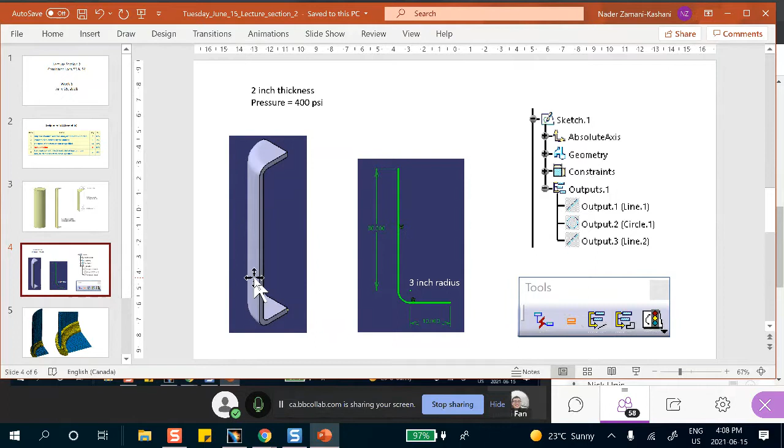Now, we modeled this thing with shell elements, right? You remember that? We modeled this thing. So if this problem is given to you, you must use shell elements to solve it.

It's a must. The problem is that shell elements have some assumptions in them. For example, there is no stress through the thickness, or a very small, nearly zero stress through the thickness. The problem is that when you get to these edges, the situation is so complicated that the assumption of zero stress through the thickness is nonsense.

So what I really want to do, if I want stresses in this area, for some reason, these shells are totally useless. Okay? You stay away from it, no problem. But close to these edges, we have a problem.

Even here, there is a stress concentration. Even here, there is a stress concentration. I drew it on purpose as a solid object, but if you have to solve this problem, you solve it with shell elements.

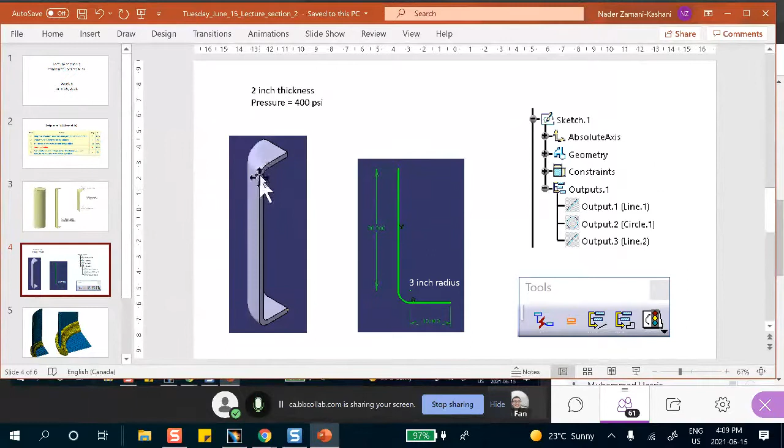However, here we also have stress concentration, and if you want to know the detailed stress distribution in this area, shells are going to suffer from the same thing that they did here, except that it's not as bad. I mean, it's bad, but not as bad as this.

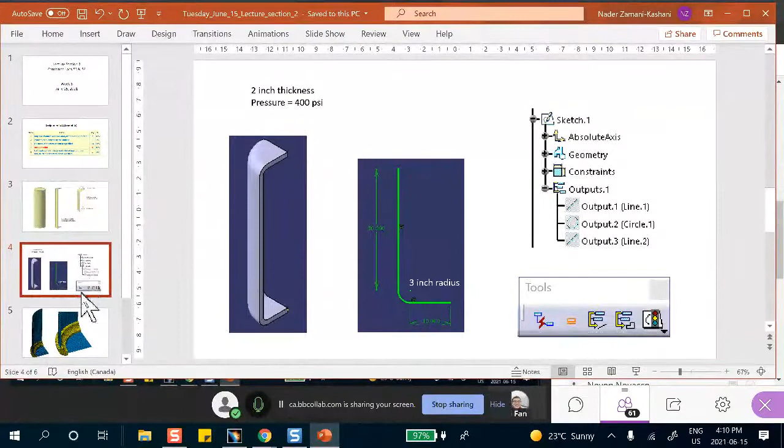So what do people do? Well, they go do something like that. In other words, the wall of the pressure vessel on the top and over here, where things are okay, not that bad, you use shell elements. And over here, where the stress concentration is, where the stresses change rapidly, you use solid elements.

Solid elements. And what do we call this? A hybrid model. We call this a hybrid model. I don't have a beam here, but that's okay. That's still a hybrid. When you have two types of elements present, it's a hybrid problem. Obviously, if you see a beam sitting there, you should model it as a beam, but there is no beam here.

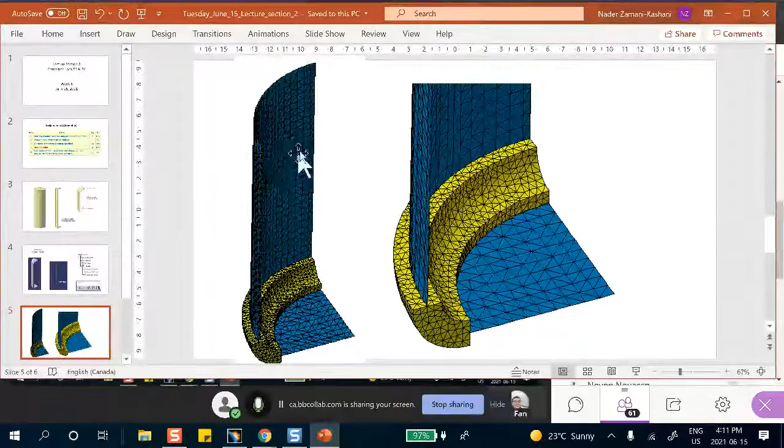Incidentally, even here, if there is reinforcement around this thing with something reinforcing it, then you model those as beams, but I don't have it here. I don't have it. Now, I'm going to solve this problem for you.

We know how to handle hybrids. We know that. And I want to show you some results, and then I want to tell you that yes, this is going to work. We know how to do hybrid problems. We know that. This is the end of the week. We have done many problems like that.

But these elements that are the default in CATIA, remember CATIA, as soon as it sees something, it jumps on it and meshes it in 3D. These are not very good.

This, where is it? Oh, here. This is a much better element, instead of those pyramids and stuff like that.

These are called... these are not tetrahedral. These are called tetrahedral, the pyramids. These are hexahedral. Now, you can do it in CATIA, but not just by saying, hey, you do it for me.

That's where the advanced meshing tool comes into the picture. If you want to do stuff like that, even for shells, and you don't want triangles like that, which are poor in general, you have to use advanced meshing tools. Okay? Now, I'm not going to do this for you, but I'm going to do that problem for you.

Any questions here? That's why we need hybrids, among other reasons. If you look at the bridge structure, you've got braces and you've got flooring and you've got, I don't know, girder boxes and things like that; you have all kinds of elements in it: solids, beams, shells.

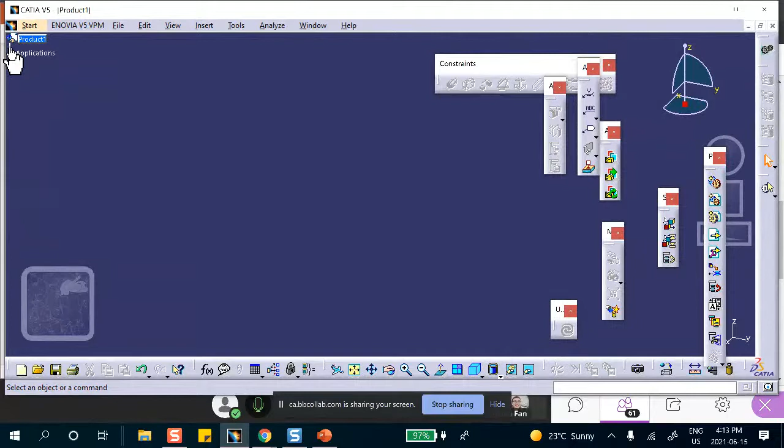Okay, how are we going to do this problem? If there are no questions about this, I'm going to do that problem for you. And in fact, you're going to learn a few things that you may never have seen. Okay? There we are. We start with a product file. I don't expect you ever to go to the advanced meshing tool. That's why I'm not going to do that second one for you, but that's where it's done.

So save it right away. File, save management, save as, desktop, new folder. Okay. What do we call this thing? Lecture section 2. Pressure vessel. Okay, how about that? Pressure vessel. Okay, good.

Oh, wait a minute. Let me ask you a question. This is a hybrid problem. We know that, and that's what we want to do. What options do we have for doing hybrid problems? Can you remind me, please? Doing it in a part or doing it in assembly? Absolutely. Let me do it as a part, okay? I can do it in assembly too, but I'll do it as a part because you get to see the thing that I want to do much better. Cancel that. Let me delete this. So let me start with a part.

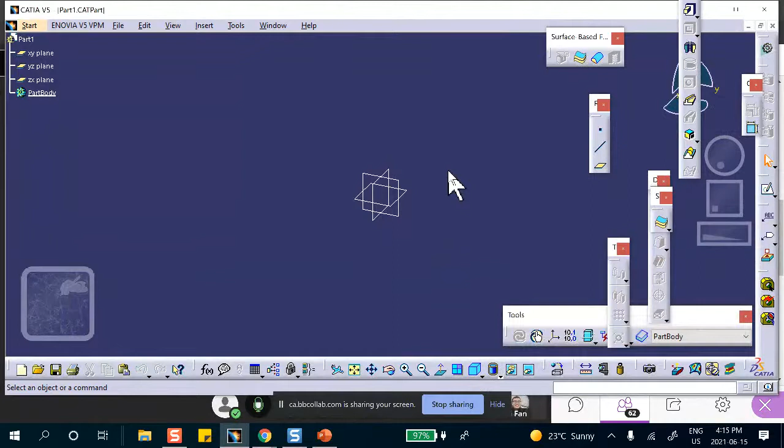And now I'm going to save it there. File, save management. I think I already made the folder for you. Save as. Okay, we may have called it pressure. I didn't call it assembly. That's good. Fine. All right. You're going to see something that, in all likelihood, you have never seen before in making this part; you're going to like it. So on that vertical plane, I will sketch.

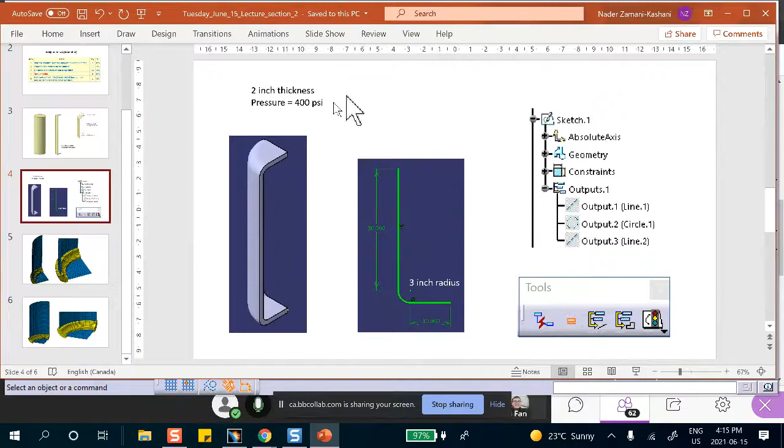Now, if you look at this drawing, I have 30 inches here, radius 3 inches there, and this is 10 inches. And remember, this is going to be a shell. I'm going to draw that thing and then revolve it. It's called revolve, right? So I'm going to draw something like that. Here, and we're going to dimension it in just a second.

It was a long day. Started at 8:30.

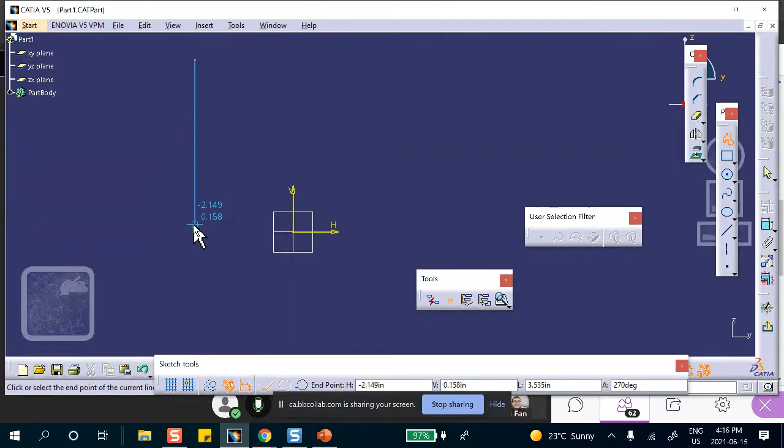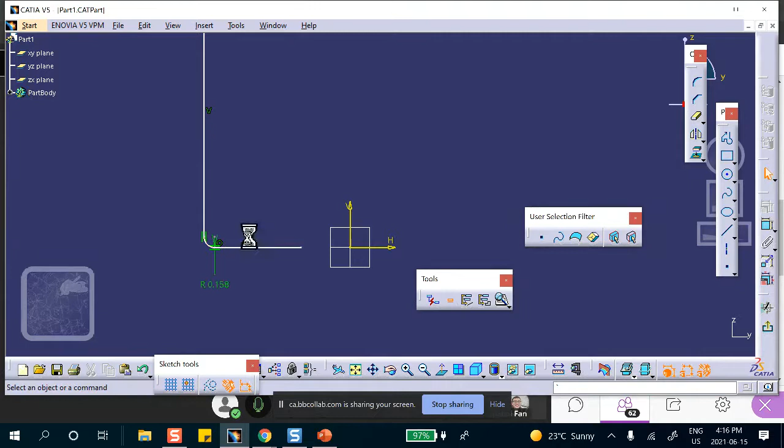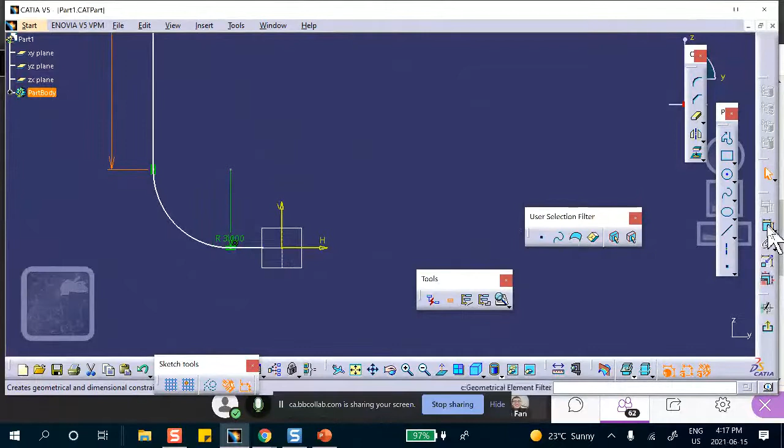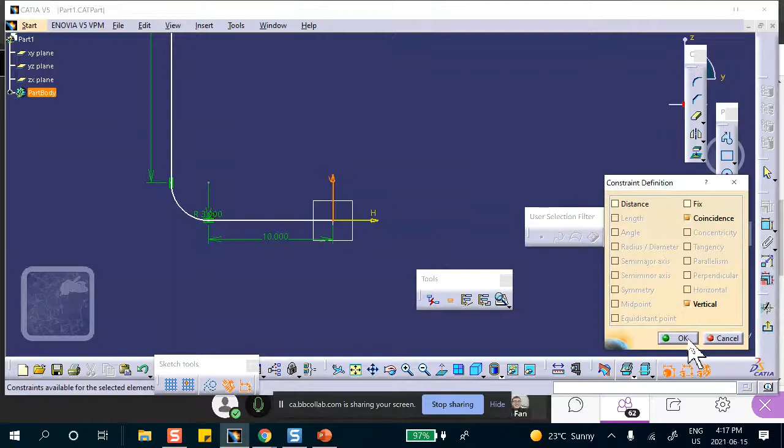Don't worry, we're going to clean it up. First of all, let me make this radius bigger. 3 inches there. Oh my God, this is 0.1. 3 inches. If that looks ugly, I'm going to clean it up again. Okay, that's good. So this height is 30. And this length is, I think we said, 10. It's just that I want to move this thing to there. So that point, control that line, you make it coincident, so shift it to the left. Okay, good. So what you see here is this.

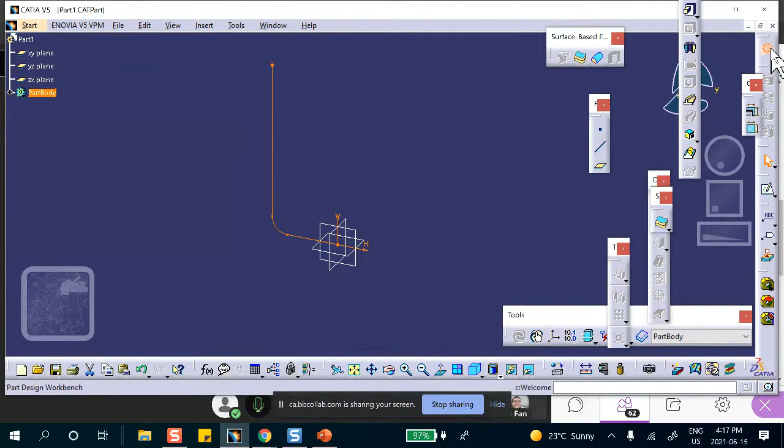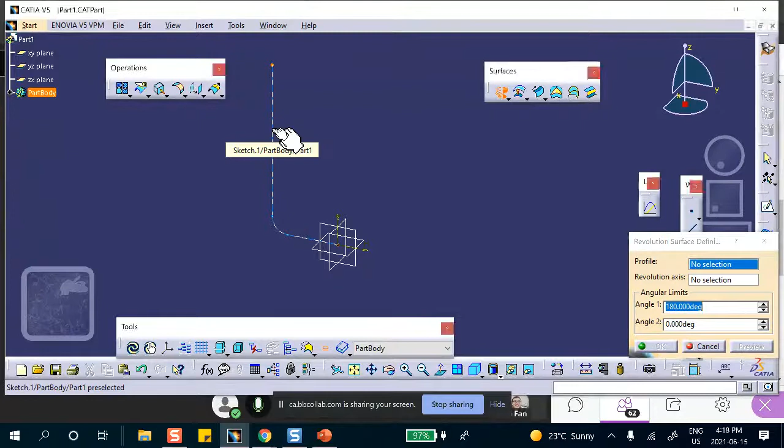Now, I want to use shell elements, I told you. So first of all, exit this. We have to be in generative shape design, not in part design. So we go to generative shape design. And I know how to make this thing go around. There it is, revolve. Now, I want to do this thing separately: this vertical line to go around, then this guy, then this guy. But the problem is that when you select the sketch, you don't have much choice. About the z-axis, the whole thing will go around. I don't want that.

Cancel. Now, of course, you could have done it as a vertical line, not a sketch. A circle, not a sketch. You know how to do circles. And this one, and then done each one of these with that. But I want to show you something else because I did actually make a sketch. So let me go back to the sketch. Down here, something that you probably never used.

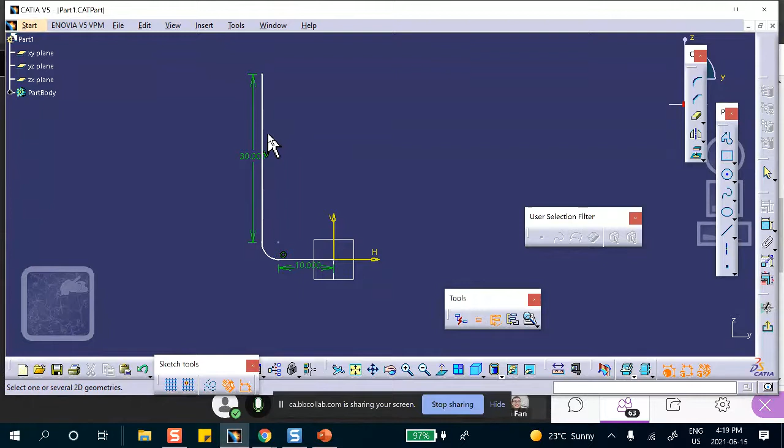Over here, it says output profile, output feature. You see that? Output feature. You click on it, and you select this line. When you select this line, it becomes a heavier, solid line. Look, if I select this thing, it became heavier, different, it's white. And I'm going to do it again.

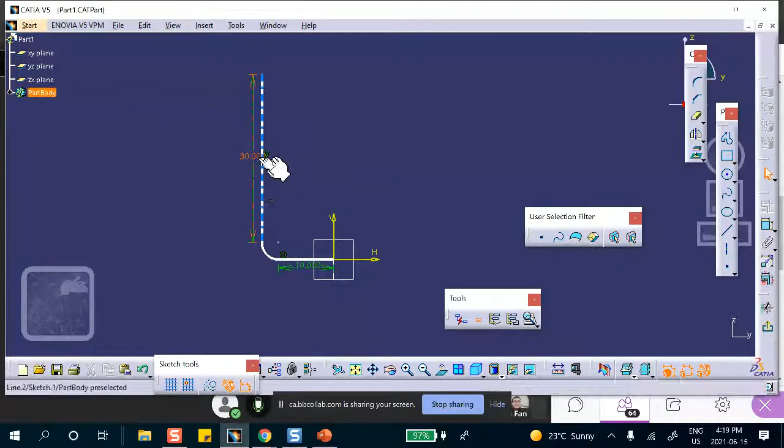This curve, it became heavier. And this guy, it became heavier. Good, good. It looks like nothing happened except that these lines, when we use this, these lines actually became heavier. Okay, you're right, you're right. Exit. Now let's try to revolve that.

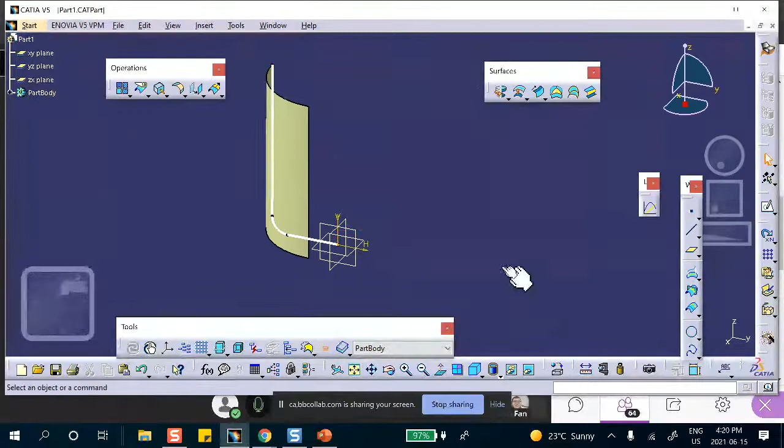Revolve. Notice that I can take that guy by itself and say revolve it about the z-axis by 90 degrees. 90. It didn't do the bottom one. The bottom one, see that? The bottom one is still there. Another one. This circle. About the z-axis. 90 degrees. You see this? You see this?

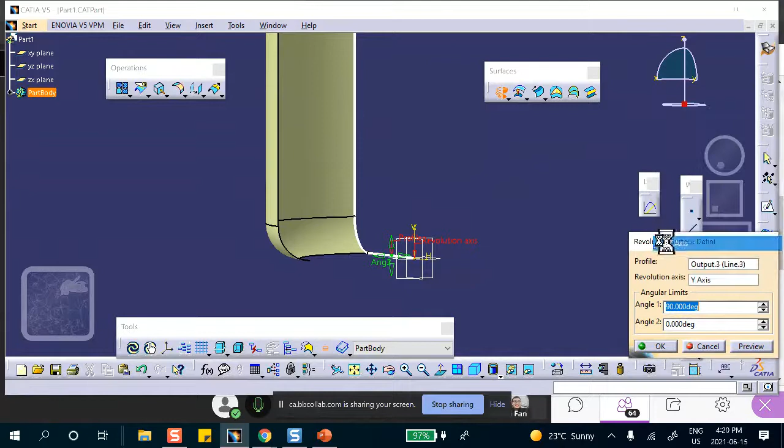Again, this horizontal one, z-axis. Try it again. Z-axis, that's what I meant, not y-axis. It says I can't do it with y-axis. Oh, wait a minute. What happened here? Hang in there. Okay, take it easy. Oh, there. Z-axis. I don't know what those sounds were for. That's what I was trying to do. Now, are there any questions so far?

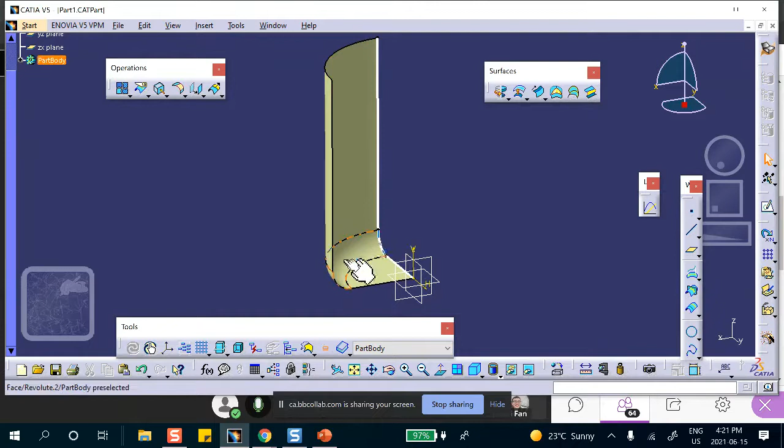And you might say, well, why did you want to do this whole thing? Because I want a solid object here. You see this? I want to have a solid object. Question. Yes. So why do you do it one by one? Why don't you just do it with the whole thing? Because, okay, if I do the whole thing, there is no problem. I can do that. But I want to create a solid object just for this circular arc. You'll see that in a second. Just bear with me.

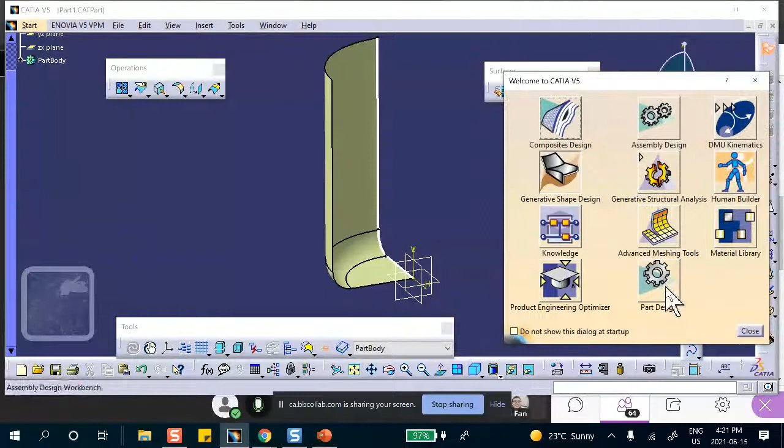I want to go make a solid object. So obviously you have to go to Part Design. And there's something called thickening, not sickening, thickening a surface. Click on it. You select that surface in both directions, 1 inch out, 1 inch in. You see this? If I had done the whole thing, it would have been a solid object. And I don't want that. All I want is a solid object here. That's it.

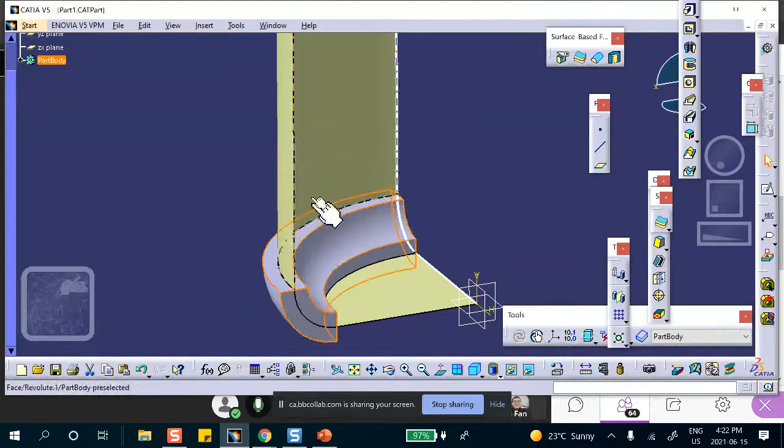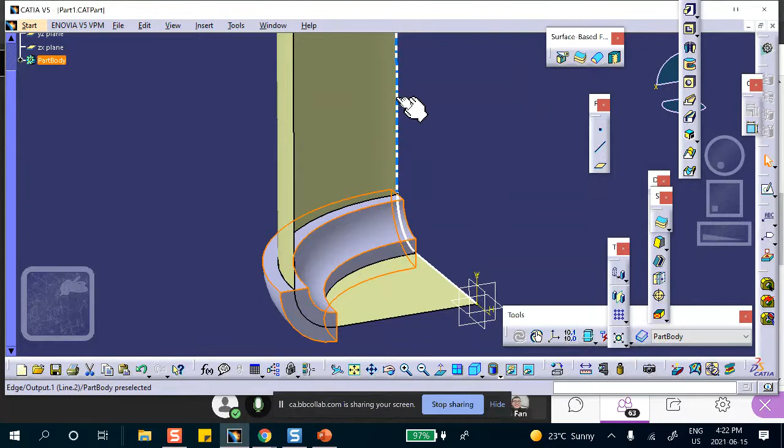Because I want to mesh this thing with tetrahedral elements, with pyramid, with solid elements, and these with shell elements. You understand why I did this thing like that? And I'm not saying this is the only way. I just wanted to show you some features that you may never have touched, and it's very useful. That business of basically getting a profile out of a sketch, something very useful. Think about it. Okay, good. So look at what I have here.

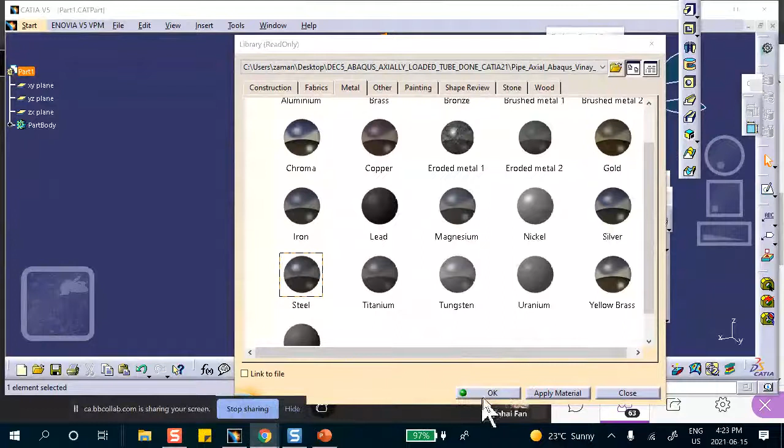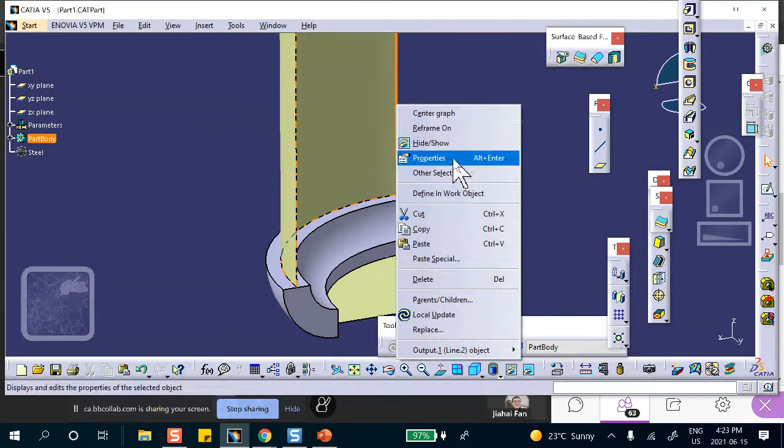First of all, let's make everything out of steel. So apply material, everything out of steel. Move this thing out of the way. And save it. By the way, notice that here, you see this? This is a surface. This is that circular surface. So I can hide it. If you don't want to do anything with it, just hide it right there. These are profiles. If you don't need them, you hide them so they go away. Right there. See? Excellent.

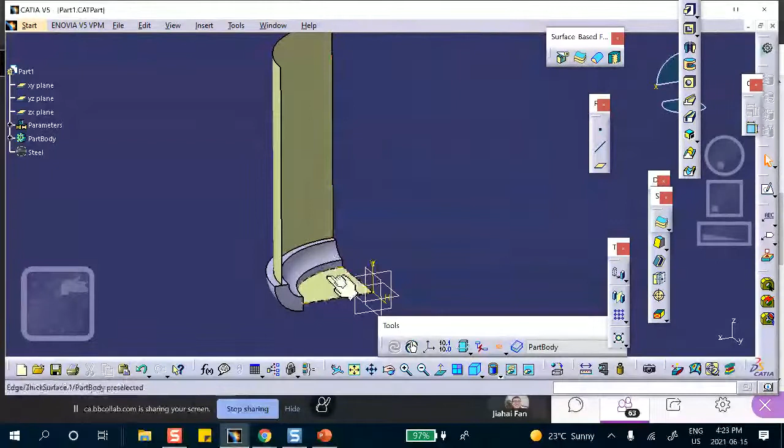This is my cylinder in the 3 problems that you have done in class. This is that plate, for example. I don't have beam elements. This is the plate. Think about it. They're coming together. Okay. Now, as far as the part is concerned, we're done. So we're going to go to Generative Structural Analysis.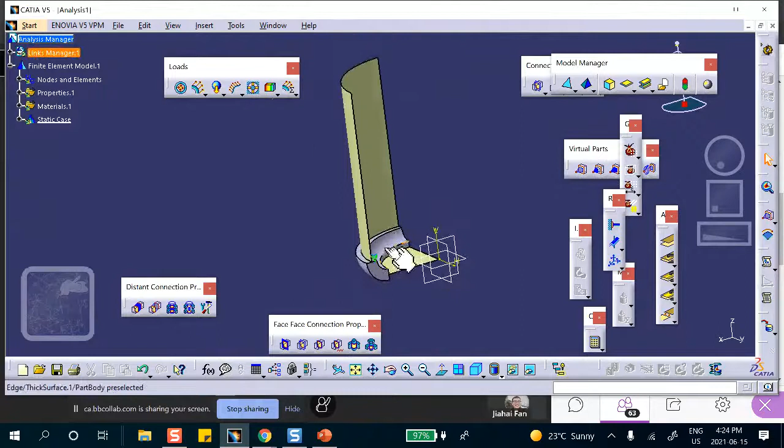CATIA sees a solid object. It jumps on it and meshes it right there. You see this? It doesn't mesh the surfaces for you, but it meshes this. If you look at your mesh, you can see that only the solid is done. The other ones you still have to do the usual way. Yeah, right there. And deactivate it. You can put the cursor here, deactivate. Okay, good. We have to do the shells.

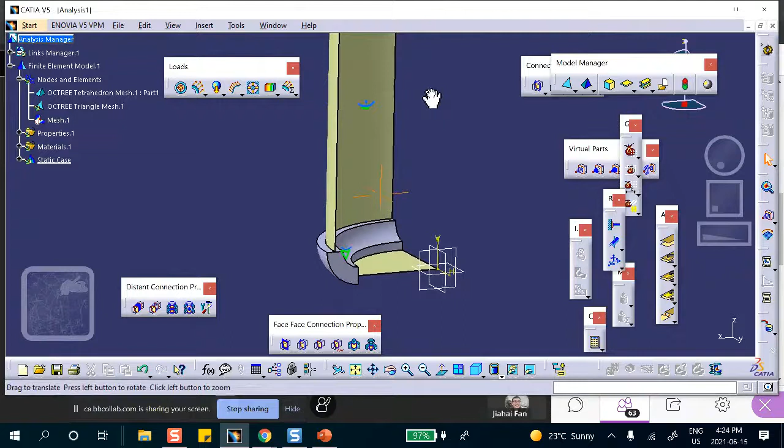Octree triangle mesh. I hate that word. I don't know, 1. Let's make it 1 and see what happens. By the way, this is parabolic. Probably the other one was parabolic too. If not, they don't have to be, but fine. I don't know what the other one was, the one that CATIA did for us. Oh, parabolic. Okay, fine. These are simple problems. Thickness. Help me. What is the thickness?

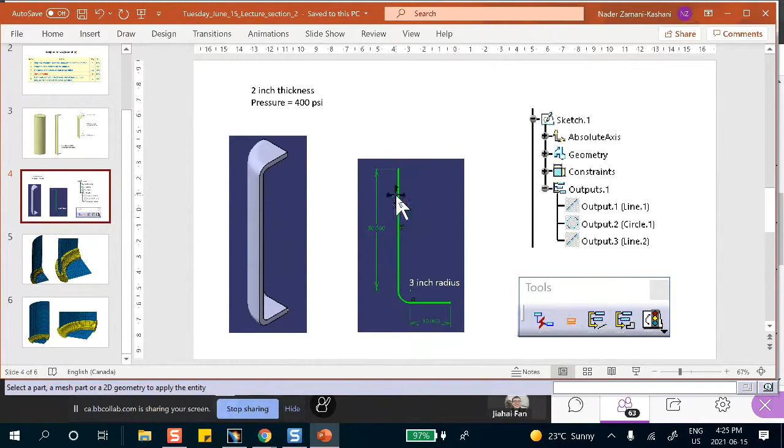Right there, 2. This is why when I created that thickening effect, I went 1 inch out, 1 inch in. That's a total of 2 inches. But these other ones are shells, so same thickness. Oh, did I do that? Yeah, 2 inches. Here's what I typed, 2 inches. I did that earlier today. Okay, yeah. Okay, let's do the other one. Is there a question? I guess not. Okay, let's mesh this guy.

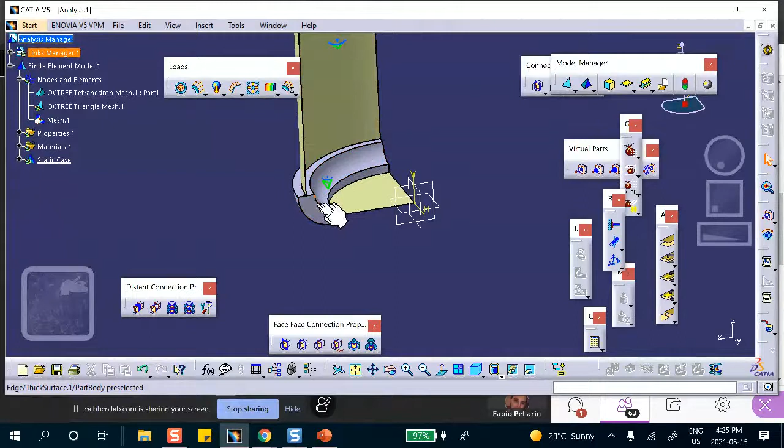Just a question with thicken. Does CATIA thicken it both ways by 2 inches, or does it thicken it one way by 2 inches? Actually, you mean for shell or for this 3-dimensional object? Well, for the shell, because a 3-dimensional object is the object. Yeah, for the shell, when you say the thickness is 2 inches, it goes 1 inch in one direction, 1 inch in the other direction, so that this is the middle surface. Okay? So this is the total thickness. Half of it is one side of the surface, half of it is on the other side of the surface. In general, that's how thickness works.

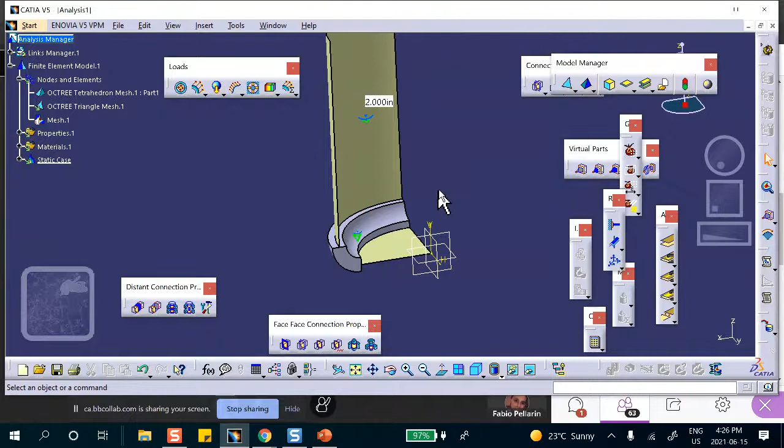This is why when I try to thicken that surface here, I say go 1 inch one way, 1 inch the other way, so that you get a total 2, so that it matches that. Okay? So let's do the bottom, right there. Okay, fine. Thickness, 2 inches, 1 inch up, 1 inch down. That's the way it does. Shell elements work like that.

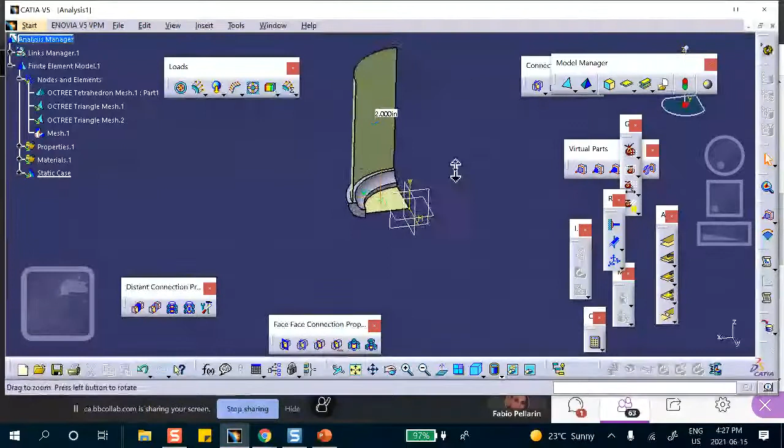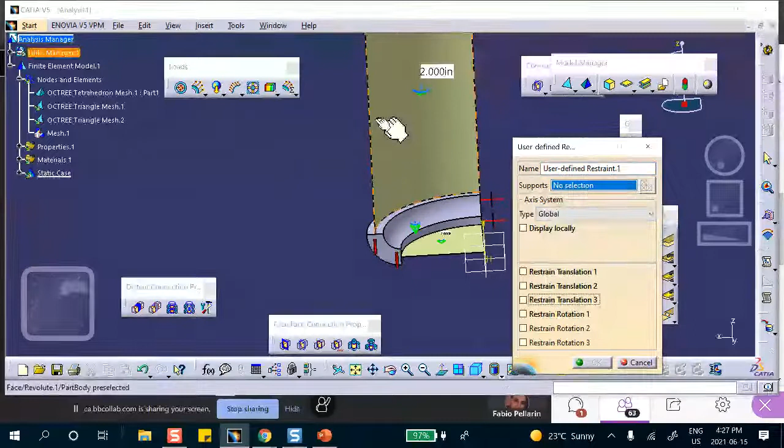Okay, so what do we have here? Now, these are planes of symmetry. Remember, these are planes of symmetry. So first of all, surface slider here. This is a solid. Turn it around. Here. Okay, very good. User-defined restraint. Uncheck that. So this edge and that edge, they lie in your XZ plane. XZ plane, do not move in Y. Rotations opposite. I did 90 because I didn't want to create a local coordinate system. Remember that guy? 45 degree. We have a problem. There we are.

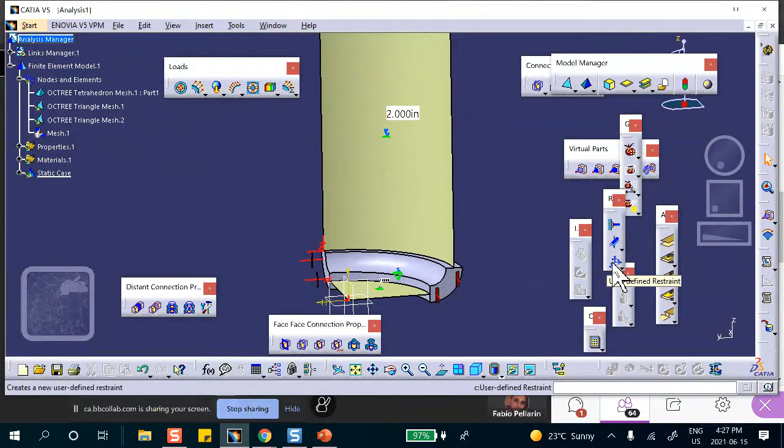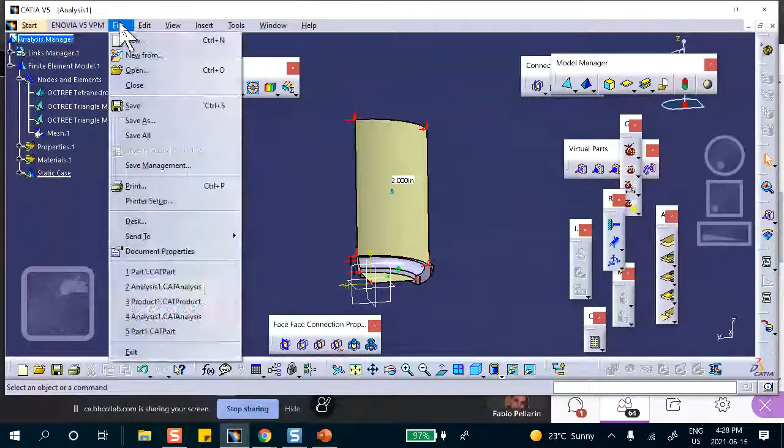Again, the other two edges, this guy and that guy, they lie in the YZ plane. They don't move in X, and rotations are opposite. Excellent. Let's go and save our analysis before we regret it. Save management, analysis, save as. This is the right folder, lecture section 2, PV, pressure vessel, analysis, very good. Please learn how to save the names properly to submit on the test. Not like this. Okay, good.

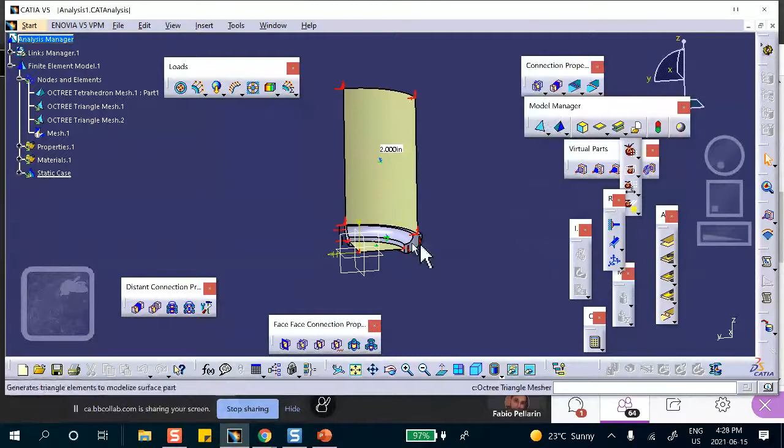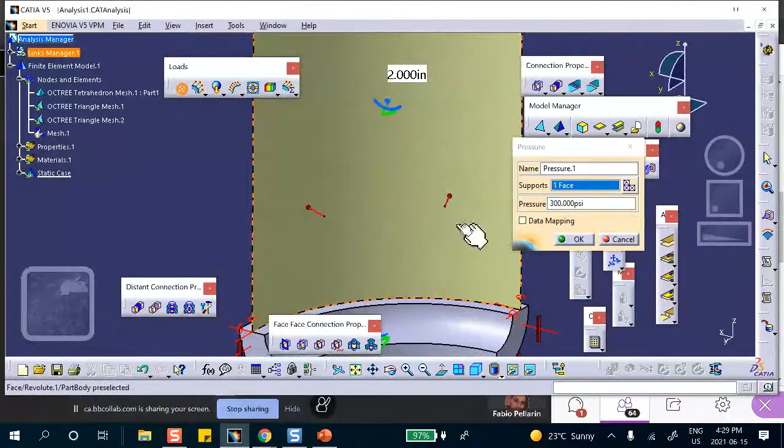Pressure, 300 PSI. Where is this guy? Pressure, where's the load? Oh, right here, right here. 300 PSI. Listen, some of these hydrogen tanks that they use in cars, the pressure goes up to, I don't know, 500-600 PSI. Okay? There. Is that the right way? Yeah, that's good. There. Is that the right way? Yep, that's good. And there. Yeah, that's good. I like it.

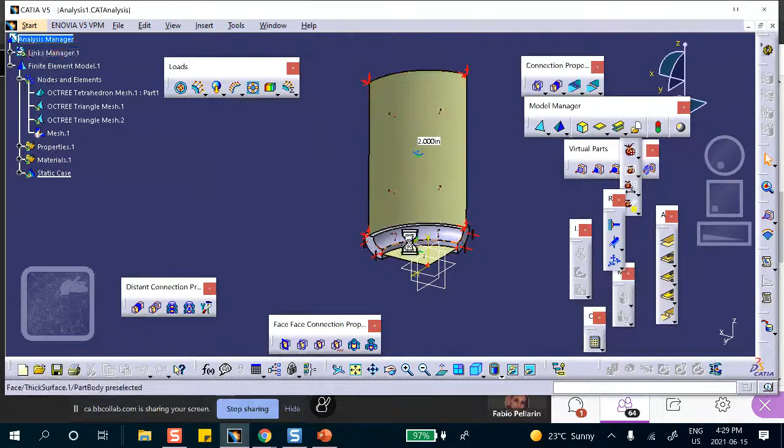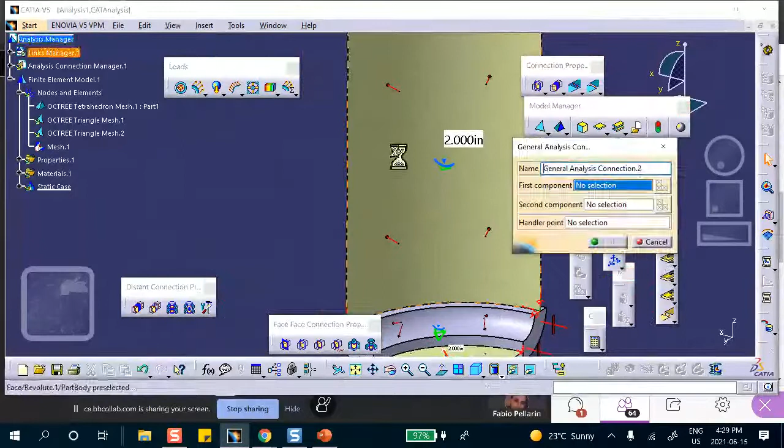Okay. Save it. And if you run it, it's going to bomb out because these guys have no idea the other guy is present, so we create connections. So connection between this face of the solid, that face of the shell. This is going to be fastened. Same thing down here, up there actually. This guy. And for the second component, that guy.

Okay. And where is this hanging there? This is fastened, right? I said fastened. Okay. Fastened right here. This guy is a fasten. There's your good old fastener sign. Is that the second one? Yep. There's the good old fastener sign on the other side. Save everything.

Would you like to get full mark on this? This is a hybrid problem, right? It has 40 marks. Would you like to get full mark? Then do something that you forgot or I forgot. What would that be? I forgot something that is going to take off about 6-7 marks from me. What do you say? What other symmetry we have? Isn't this a plane of symmetry? Isn't this a plane of symmetry? Top. Yes, that's good. You're absolutely right, Fabio, sorry. Okay, so you want to get full mark? Okay, no problem. And check all of these.

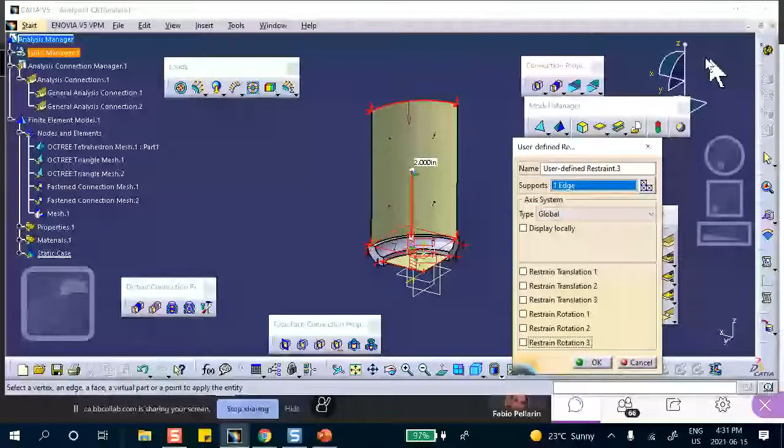Take the top. It's in the XY plane, does not move in Z, and rotations are opposite. We say good, we save it, and then run it.

Always pray, always pray, particularly before the test.

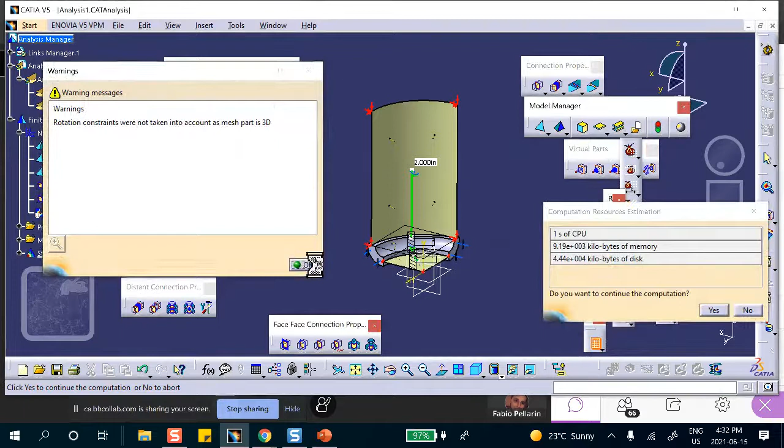It just says that the elements are not very good looking, basically. It is bad. Remember, I told you these problems, these elements, you got to be very careful. They may run, but the results may not be reliable. We know that none of our results are reliable anyway, because we're not doing any mesh convergence study. But this is complaining already about something. Let's run it and see what happens.

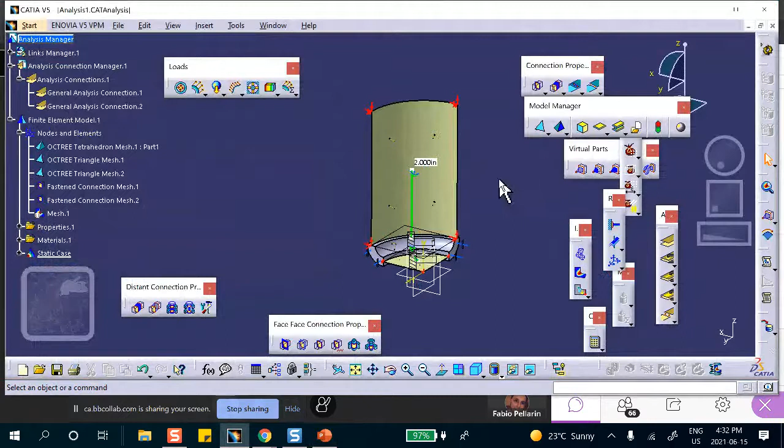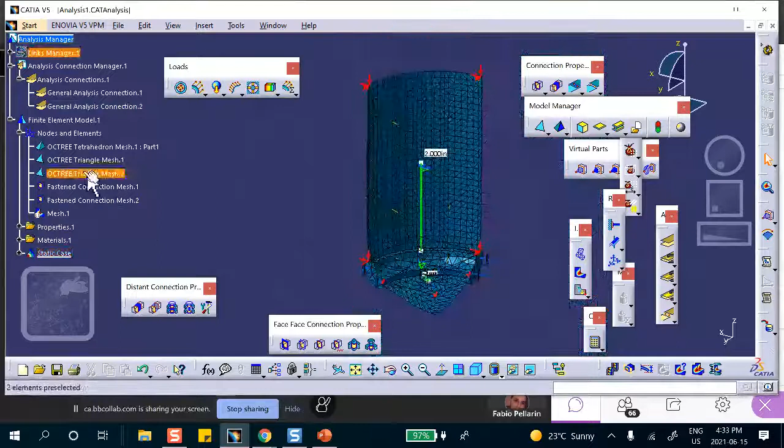We did. Let's look at deformation. Okay, first of all, I don't want to see all this junk. These are all the extra elements that are created because of the fasten connections and things like that. Let's just see the octree triangle and the solid one, so that we don't get that junk. Anything that we don't like, we're going to hide. You will see easily why we got that message.

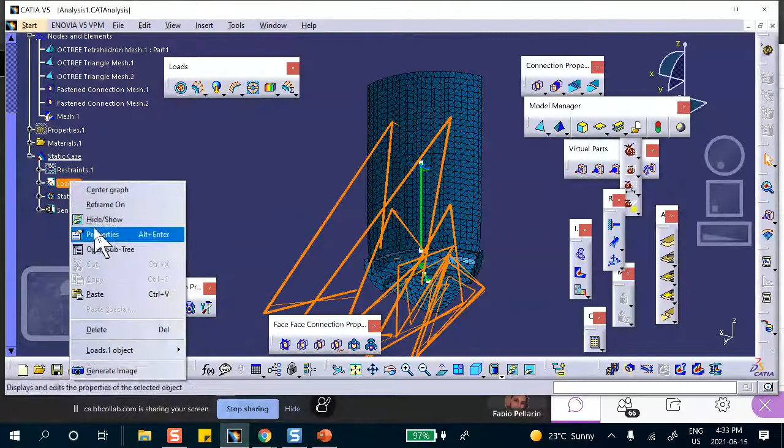So let's hide the properties. Let's hide the restraints. Let's hide the load. Not that, not paste. Hide it, I meant hide. Okay, let's hide the connections. Hide these elements. Let me hide the whole thing, see if it works. Good.

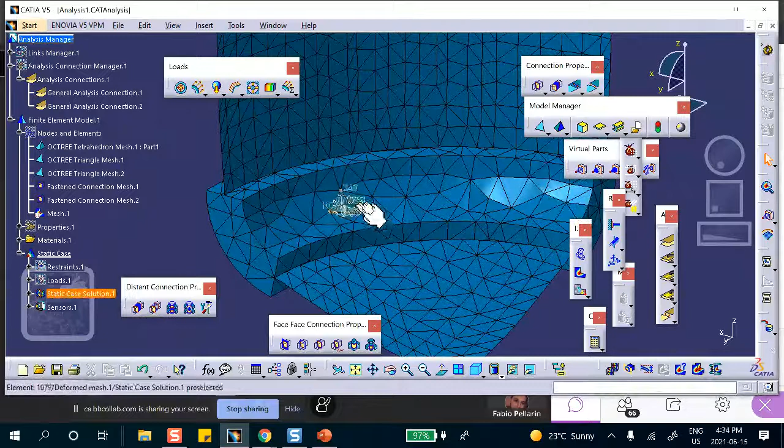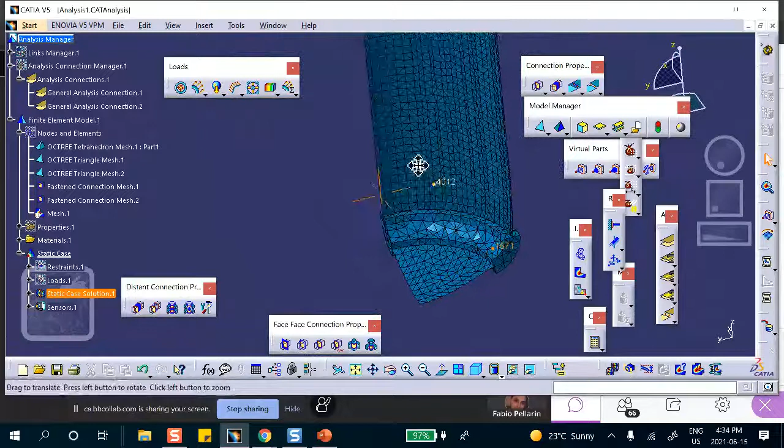If you looked at this result, it already tells you what the problem could be. Look at the shading. It tells you this is not a fine enough mesh. You can see that. Because these are supposed to represent that surface. Yeah, they do, but if they're that good, I will not get a lighting like this. So that message is saying that these are not very good elements, or the mesh is not very good. Okay, let's look at the stresses. Change the rendering.

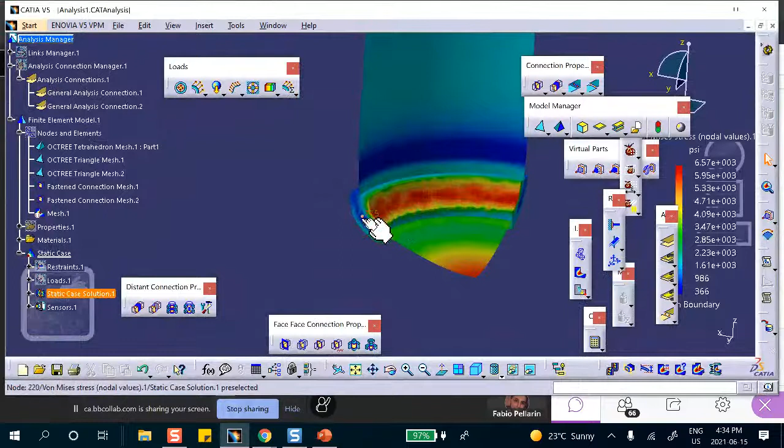There we are. It already tells you that although I don't have a 90-degree angle at that juncture, I have a rapid stress variation there, which is representative of this red color. The colors change very rapidly, so there is definitely a stress concentration here. So the results for stress are not okay there. And if you're lucky, we are okay here, but not in that area if you use all shell elements.

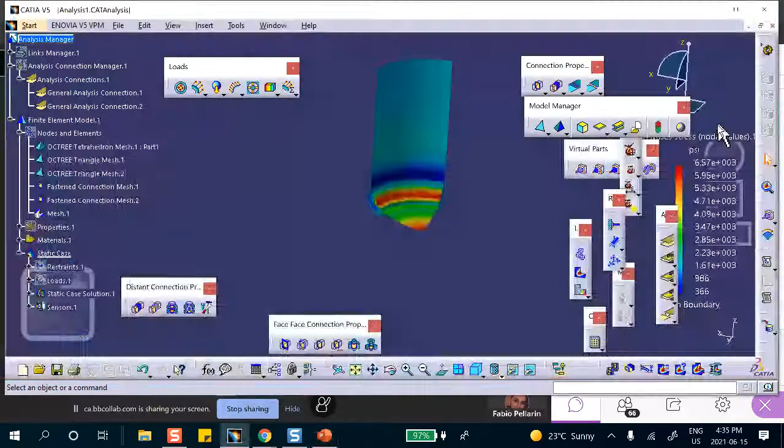Now if you go and create a mesh like this, it's going to be a lot better. There's no doubt about it. You already know that. Don't trust any of these because we haven't done a mesh convergence study. You know that. Okay. Are there any questions here? Because I want to show you something.

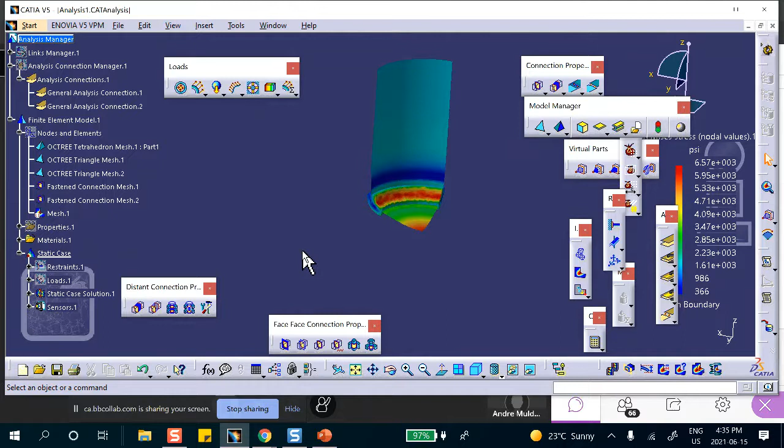I have a question, Professor. Go ahead. When you do the revolve of the lines, surfaces, how do you select which side the pressure will end up going on? Okay. If you look at it and it's wrong, then just put a minus sign. When I did it, it does it on the opposite sides of the shells, but on the right side of the solid. Okay, here's what you do then. That's easy.

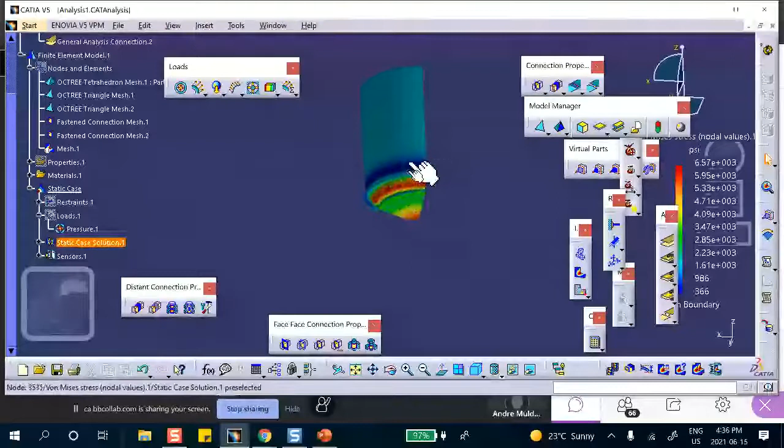If that happens, do three different pressures. Whatever is right, leave it. Whatever is wrong, change it. I was lucky that all three of them worked out the correct way. But if these two are okay and this one is wrong, or the other way around, just do three different ones, because you don't have control over that. The only control that you have is to put a minus sign. So do a pressure here, a pressure there, a pressure there. If any of them is wrong, put a minus sign.

Okay, thank you. I was just wondering if there was an arrow that you could click, like on join, to switch the sides. Oh, it has something to do with join. We don't have a join. In fact, a surface has a positive side and a negative side. That arrow that you see when you join things gives you the direction of the positive side. And pressure is always opposite to that. Remember, pressure is compressive. On any object, when you say 50 psi, it means that you're pushing into it.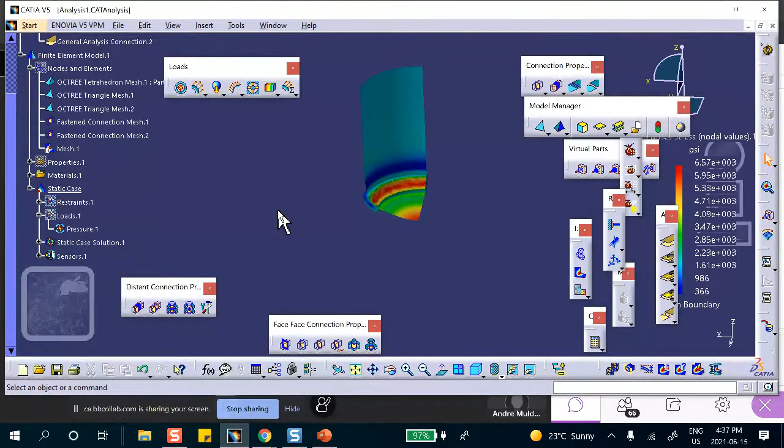So it has something to do with that arrow, which we don't have here because we did not join. If you want control over those things, you better join these surfaces individually, and then you can flip it, and that takes the correct pressure side. Because we didn't have to, we didn't join it. That's why the only control that we have is the sign of that P. That's all.

Now, I want to show you something here. This is finished, but I do want to show you something. Let me cancel this. I still want my part, not the product. Okay. So that analysis is gone. I want to show you something. This is the one that you saw a few minutes ago.

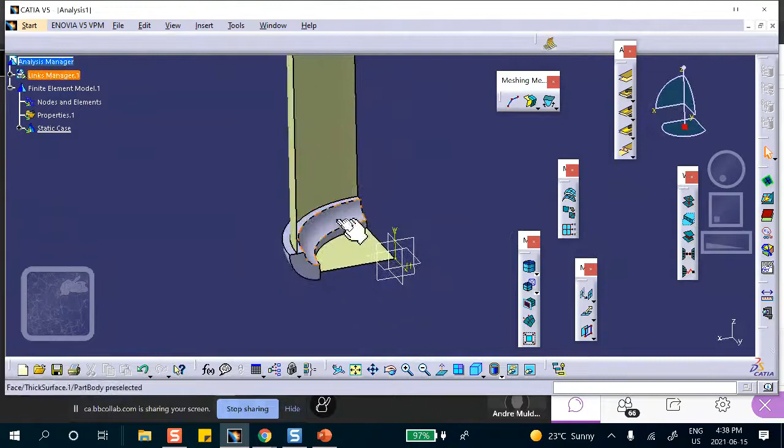Let me go to Advanced Meshing Tools. I want to show you something. Advanced Meshing Tool. When you go to Advanced Meshing Tool, CATIA doesn't do anything for you. Only if you go to Generative Structure Analysis, which says, oh, if I see a solid, I'm going to mesh it. But if you go to the Advanced Meshing Tool, CATIA won't even do that for you.

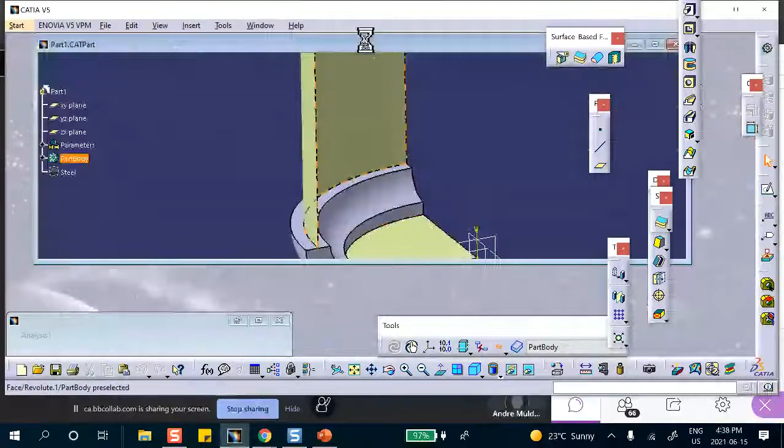So let me do the following. Let me mesh this. Let me extract this face, which I should have done a minute ago before I came here. So let me go back to my part. Generative Shape Design. Extract a face because I want to mesh it. Extract a face. This face. I want to extract this face. Surface. Okay, now I go to my analysis.

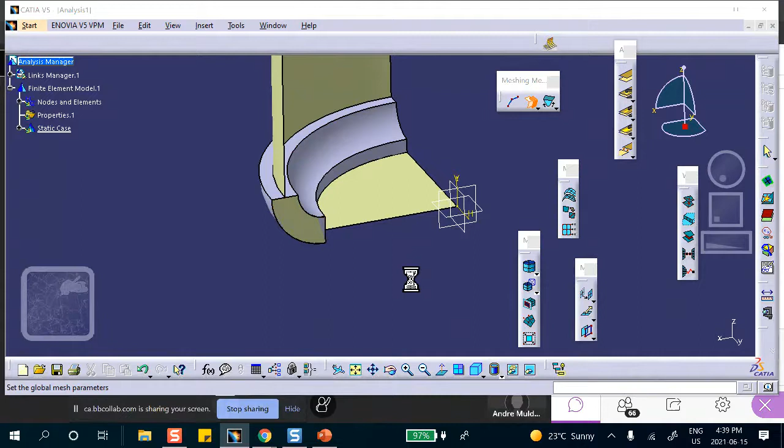There we are. You see, there's a surface here. And I can mesh it with this fancy surface mesher. Okay, so there. Okay, mesh. It looks like that. Okay, it's a horrible mesh. I want it small. We can make it smaller, no problem. So double click on it. I guess you exit and then double click on it. No problem.

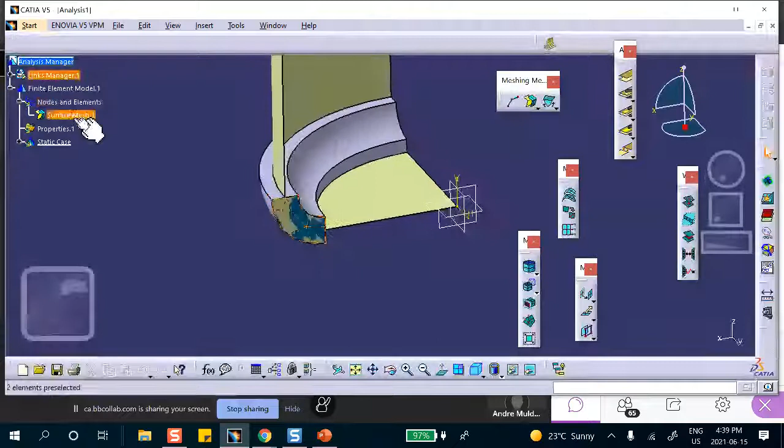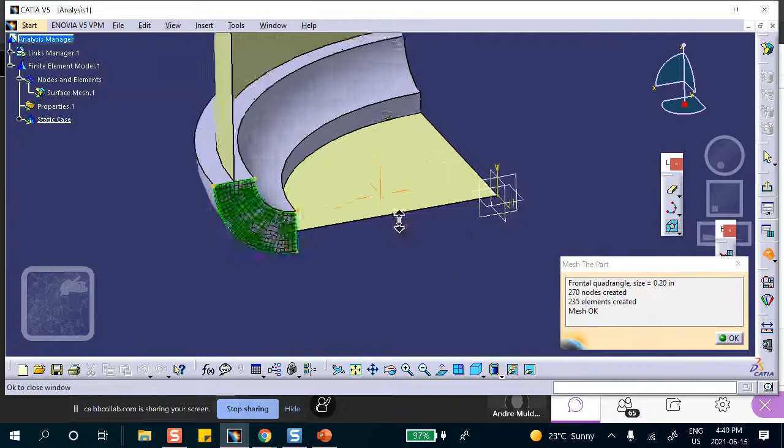Okay, so one is not good. So let me put, I don't know, 0.4, 0.2, okay? 0.2. Okay, don't worry about it. Say okay. Mesh it. I call it zap it. There we are. Is that good? Okay. So I created these elements. These are shell elements, actually, because I did it on a surface. Now I can take this thing and basically extrude them through this part and create solid elements for you.

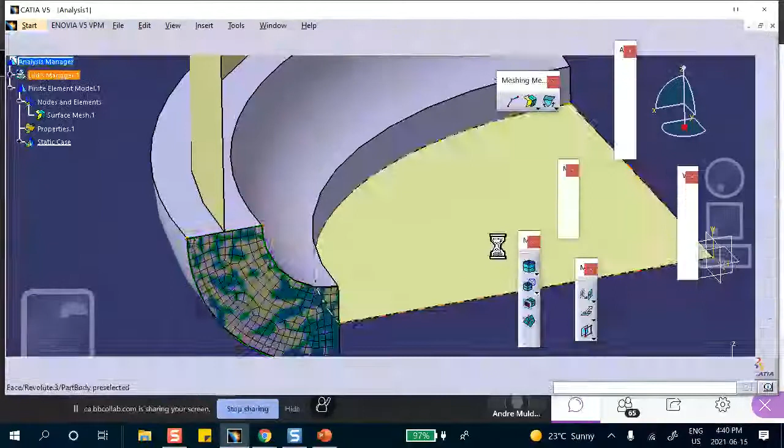Okay, so let me do that. First of all, we have to exit this. And then if you look at these, you recognize beam, you recognize this guy, you recognize the one that I just used. We haven't used it much, none at all, actually. Sweep 3D. You got to read it carefully. See what it says. Select the volume to mesh. See at the bottom left corner? Select the volume to mesh.

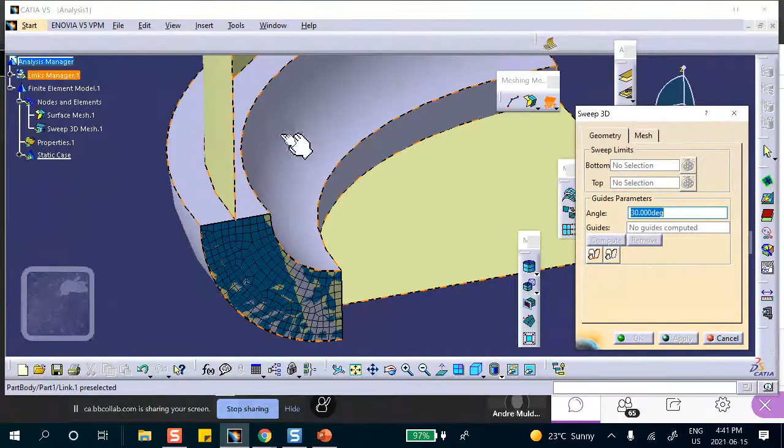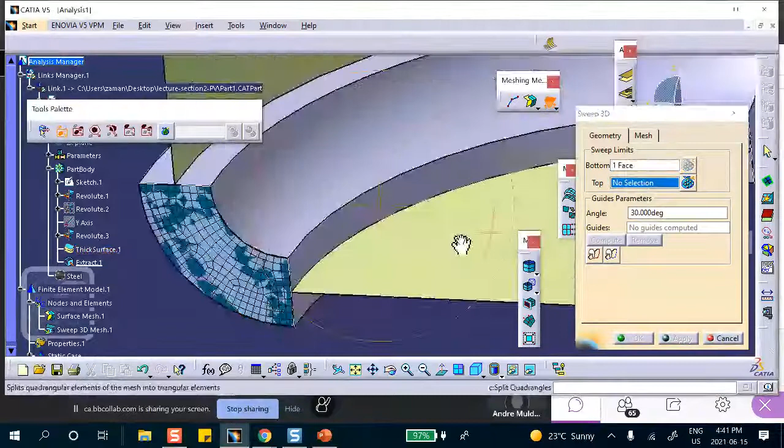Now, the volume to mesh for me is this guy. Let me try to select it from the tree. That's thickening, not sickening, thickening. Where is that? This guy. Okay. And then it says bottom. So this is the bottom. And then it says the top. Top means the other side. This side. And then it says how many? Let's put, I don't know, 30. Try and pray.

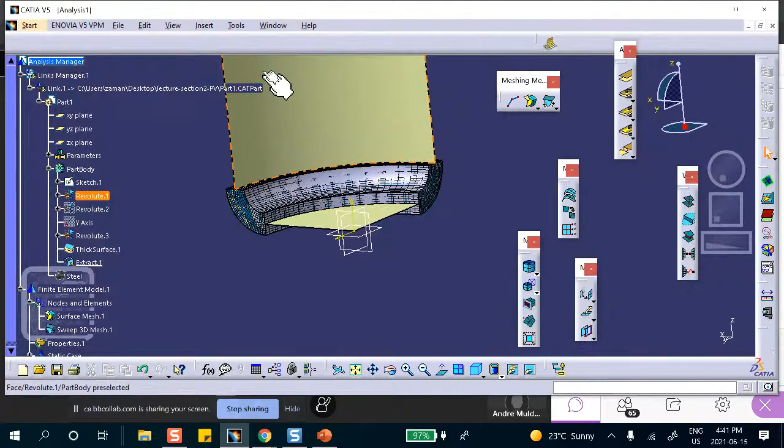Okay. So let's go to advanced. The rest, obviously, you have to mesh this and etc. But I'm going to go to Generative Structural Analysis because I want to show you the mesh. It's very much easier to see it in the Generative Structural Analysis right there. And you can see there is some order here. That's why these elements are better than that guy.

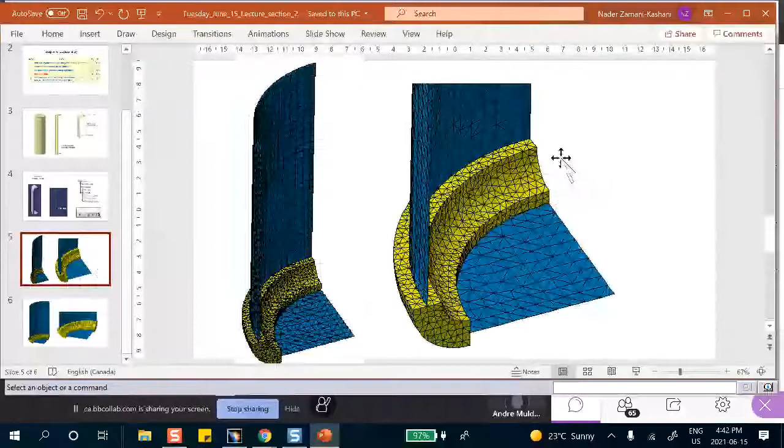Okay, so you're not responsible for advanced meshing tool. You're not responsible for generating this kind of mesh. But the fact that you're not responsible doesn't mean that you shouldn't know for future, for your own good. Okay?